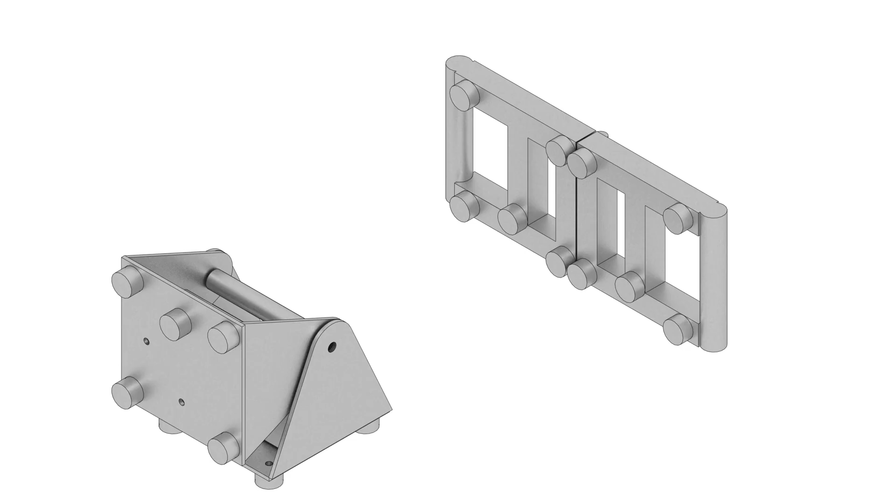Complex rigging systems make use of truss hinges to connect truss at a variety of angles. In the latest version of Spotlight, we've introduced new capabilities for connecting hinged and bookend truss to other truss objects, making it easier for you to design with freedom, knowing that all of your truss will be properly connected.

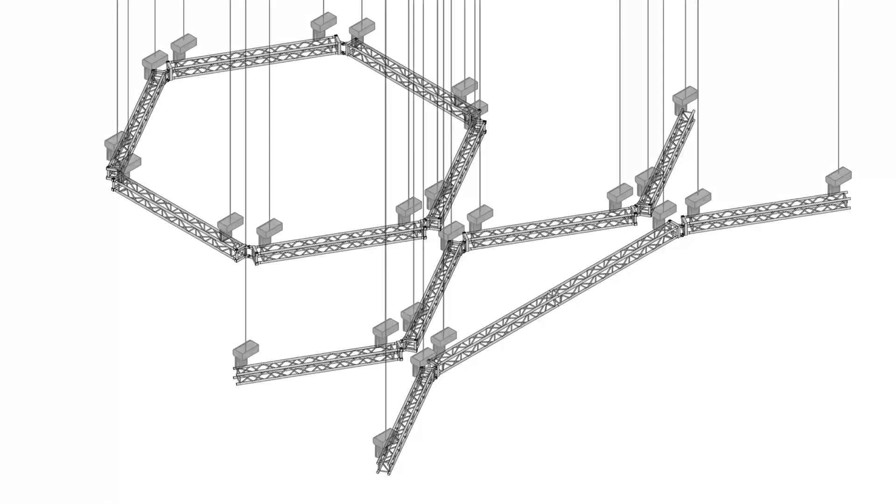With enhancements to Braceworks, truss hinges will also produce accurate results when you finish your Braceworks calculations, ensuring that you can design with confidence. When it comes to inserting truss hinges, the process is similar to inserting any other truss object. In this document, we are starting off with a few pieces of connected truss.

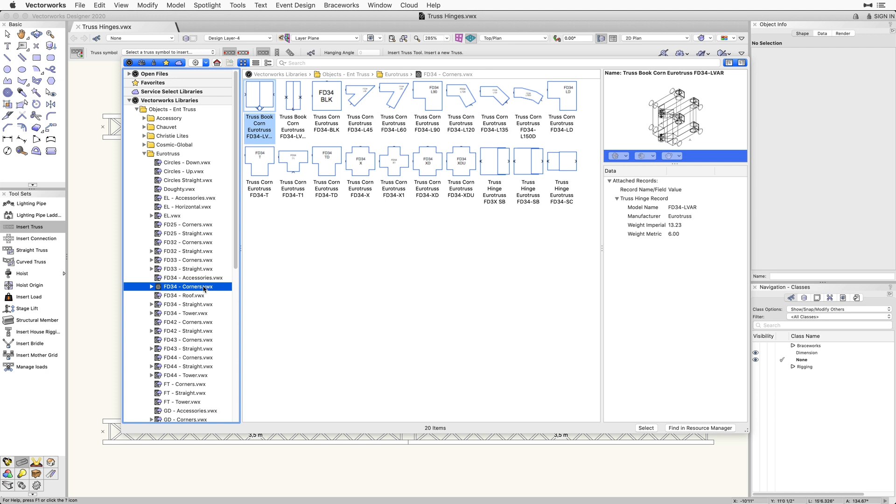The first thing we will need to do is activate the Insert Truss tool and select a piece of hinged truss from the drop-down menu located in the Tool Mode bar. Because the truss we are using is Eurotruss FD34, we will need to locate the file fd34-corners.vwx. To see only the hinged options, we will need to select the Hinges folder from the file.

The first hinge truss we will use is an example of a bookend or a book corner hinge. So we are going to select the symbol named Truss Book Corn Eurotruss FD34-LVAR Steel. With the symbol active, we will need to hover our cursor over a piece of truss, the same way we would need to when inserting multiple pieces of truss.

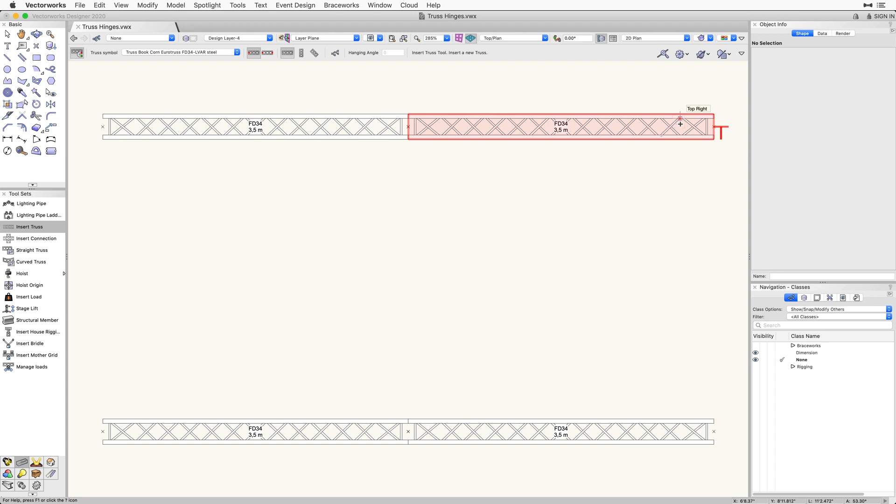When you see the red line oriented so that the hinge would open downward in a top plan view, make your first click. This will place the hinge. The second click will determine the angle of the hinge. As you move your cursor down vertically, you will see the hinge open up in the preview. Once the hinge is open, make your second click. This will place the hinge and attach it to the truss at the angle you specified.

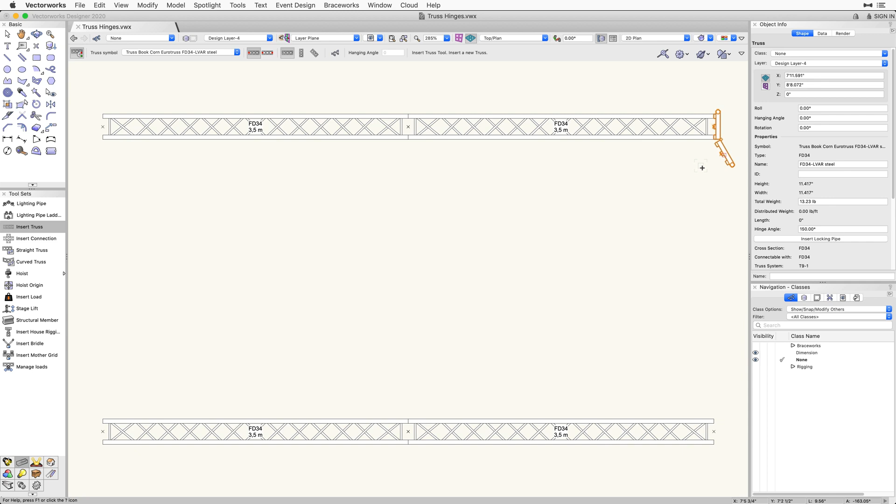With the truss hinge selected, you will notice that two blue control handles appear. If you adjust either of these handles, you can change the hinge angle. You can also enter the hinge angle through the Object Info palette. With the hinge adjusted, we can select another piece of truss and attach it to the other side of the hinge.

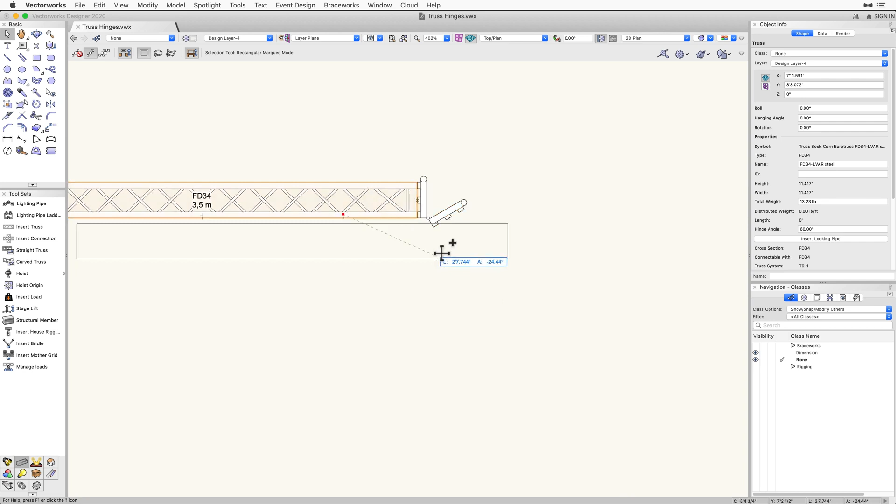Next, let's go over the process for inserting a truss hinge that will allow us to change the connection angle for the truss in a vertical orientation. Once again, we'll be starting off with a couple pieces of straight FD34 already inserted. Once again, we will activate the Insert Truss tool and select the drop-down menu to choose another truss hinge.

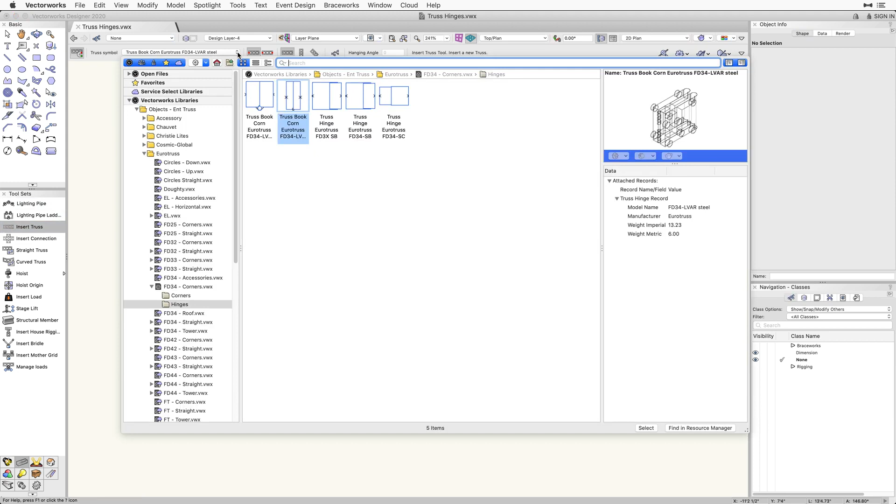From the Hinges folder, select the symbol named Truss Hinge Eurotruss FD34-SC. Now we will insert the hinge on one end of the truss in a top plan view. Because we are no longer using a book corner truss hinge, we will need to change to a front view before we can make any further changes.

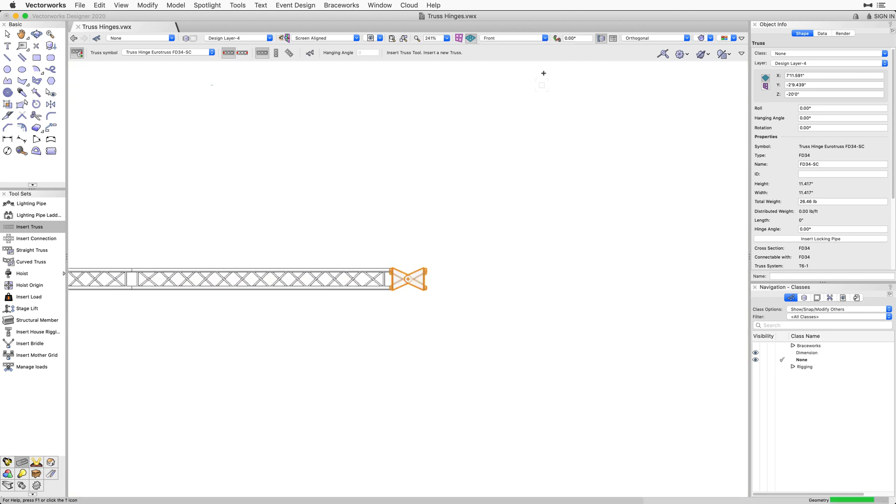By using the blue control handles, we can now change the hinge angle. Keep in mind, this can also be changed through the Object Info palette. Once the hinge is adjusted, we can select a piece of truss and attach it to the other side of the hinge. And that's how you're able to insert a hinge at any angle into your project.

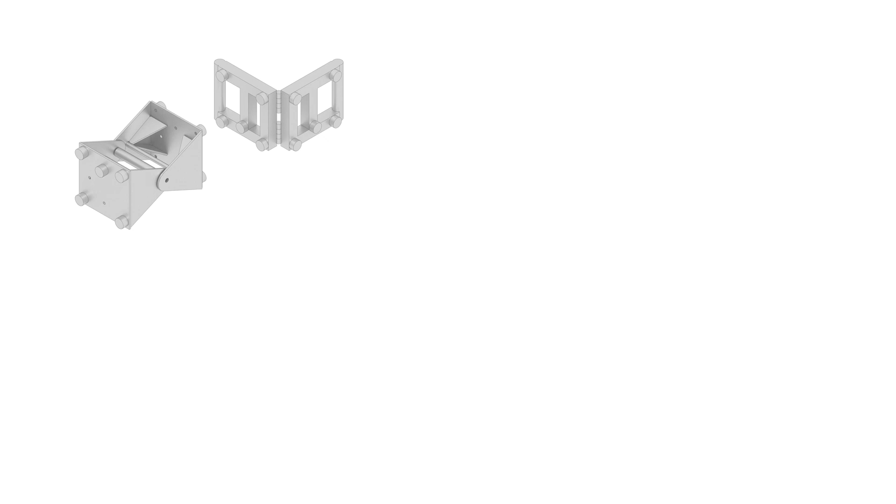When a standard corner block will not work with your design, you'll have the ability to insert a truss hinge and know that your design will be realistic and ready for Braceworks analysis.